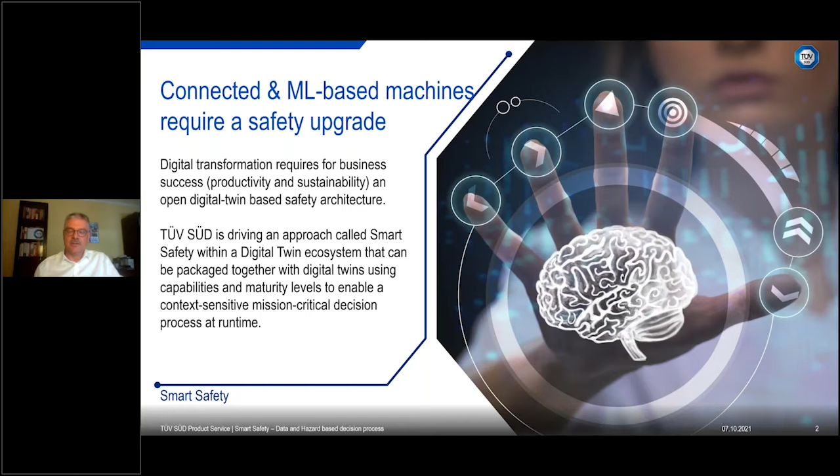Safety principles require an upgrade to incorporate context-sensitive, mission-critical decisions for connected factory lines. The foundation has to be an open source digital twin ecosystem, and I'd like to introduce principles for how we can upgrade safety for such a system.

I'd like to focus my talk on 4 topics. Do we need a 4th pillar in the safety world? What we have learned in the direction of digitized safety compliance management. Then I'd like to introduce the principles of smart safety. I'll address a couple of use cases to show you the way we apply it and what are the benefits, and I'd like to end my talk with a summary of smart safety.

Safety and trust in production is based on 3 pillars that we have been utilizing for many years: requirements on organizations, the capability of people—we train people and have certification for persons—requirements for the development process, where we certify process capabilities to ensure the quality in our products needed for safety applications, and the 3rd pillar, requirements for the product, which we also certify and test.

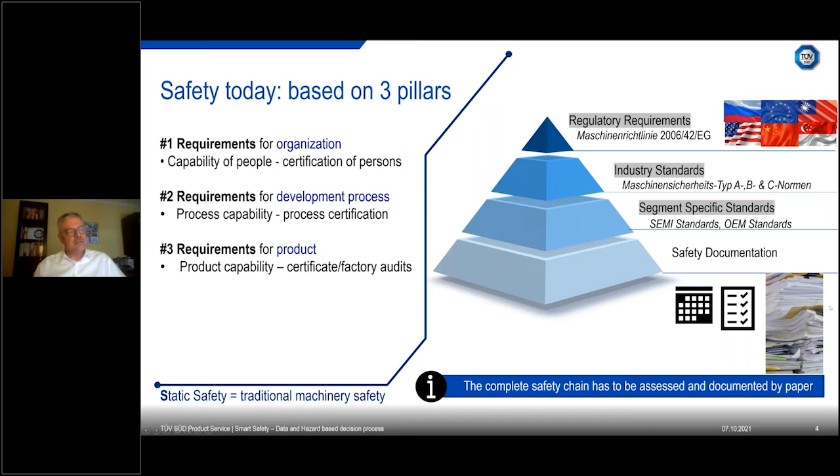From the regulatory requirements, we derive the major topics, then we have the industry standards, and we come down to the segment standards. What we see at the end of the day is mainly safety documentation. But safety documentation, even if it is Excel or PDF or requirement management, at the end of the day is paper-based. What I'd like to discuss today is how we can bring this kind of documentation into the digital world.

10 years after Industry 4.0 was introduced and invented, we still miss the adaptive and autonomous factory lines, which are able to handle changes of products, changes of supply chains, and different qualification of workers. We don't see this. We are still waiting.

The question is, why is smart factory hardly available? The focus on decision making was missing. The focus on upgrading the safety architecture to enable decision making for mission-critical applications was missing in the past. How could industrial automation work without trust, especially trust into safety and security?

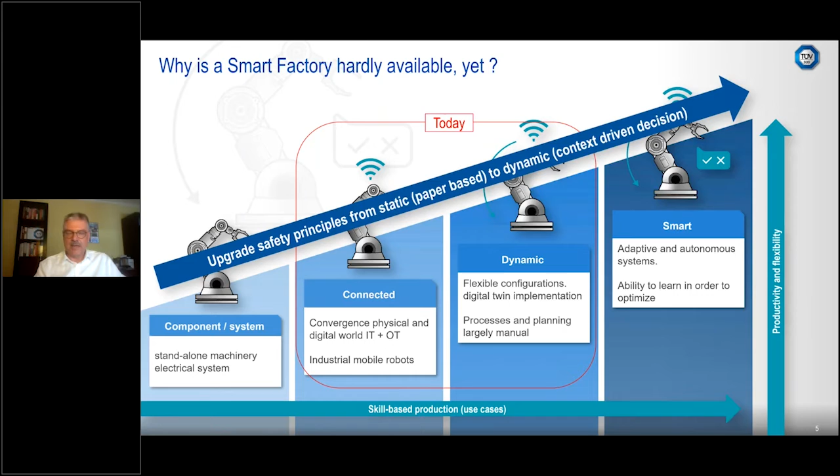So we have to do our homework, and I'd like to show on the slide how to upgrade the safety principles from a static, paper-based, PDF-based world into a more dynamic one, with context-driven decisions.

Smart manufacturing, as we see on the right side, is based on data analytics at runtime, optimization of processes, and predictive services. Most of our customers are working in this world.

The technical safety lifecycle has to incorporate all relevant changes during production and all modifications during maintenance and so on. We have to accept that a static assessment has to be combined with some dynamic elements to generate the level of safety and security we need for this ecosystem.

At TÜV we have been working for more than 5 years to add a 4th pillar to this technical safety lifecycle. We call it an event-triggered hazard and technology assessment and a validation of the measures required at runtime.

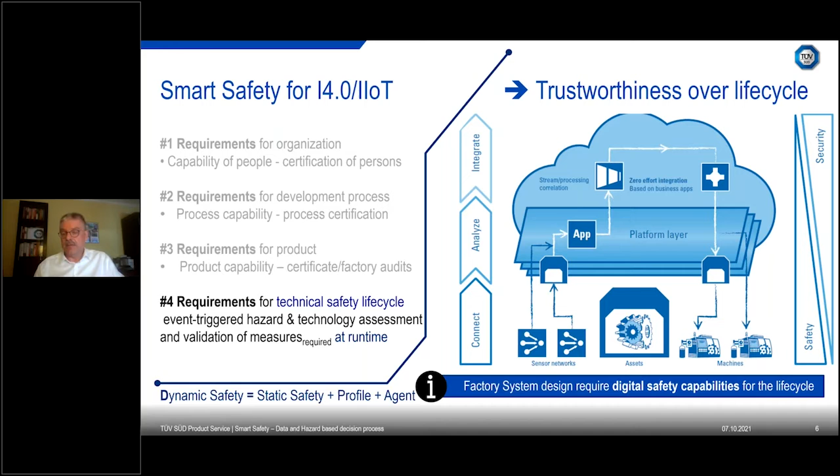This fourth pillar is the enabler for concepts like plug and produce, and also smart safety or condition-based safety, under consideration of the environment of the machine and the state of the factory, recipe, people, and machines.

What do we learn within TÜV? That is a topic I'd like to focus on in the second chapter, and the direction we are going in the safety world. I'd like to focus on the technical lifecycle of a machine, because smart factories consist of a number of machines, tools, software apps, people, workers, and so on.

Let's start with the typical design phase of the machinery manufacturer. We make the correct hazard and risk assessment on paper. We develop the machines according to the rules. We integrate the machines and confirm compliance typically with an attestation of conformity, well known as the so-called CE conformance. Then we start to modify on a daily basis, assuming mostly all minor changes will have no impact on the safety concept defined years ago.

This is true if we have a limited number of changes and if people can really judge all of these changes. But at the end of the day, today we have to accept hundreds of minor changes in apps, in software, in configuration, in recipes. And the question is simply: do we have the right safety measures in place that we designed and agreed on a couple of months or years ago?

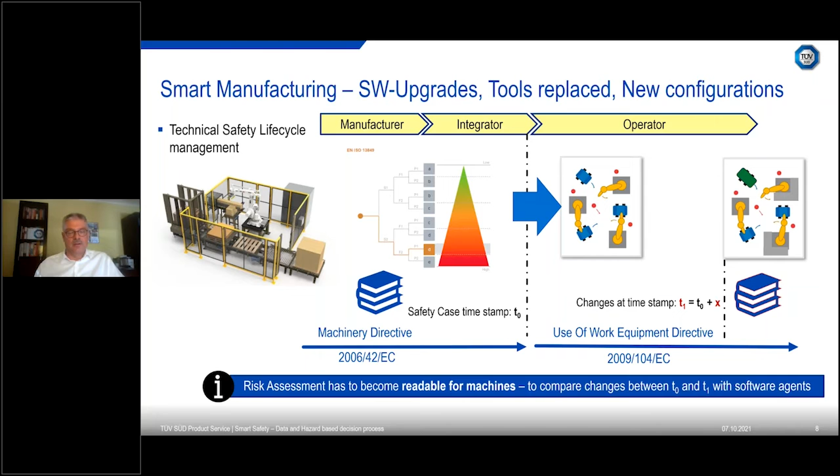So it is clear we have to be able to prove within the digital twin world if the assumptions we made, I call it here this slide at T0, are still true. And if yes, we go on. And if not, at least we should document these changes and we should be informed. We started at TÜV in the Smart Factory KL with the thinking of doing a risk assessment at runtime, and it's a very complex area. The community has been working for more than 10 years on risk assessment at runtime, and you know from autonomous driving that it's a complicated task. Today I'd like to discuss that we do not need to do a complete risk assessment. We have to bring the right topics, hazards, into the digital world, and then we can solve the problem in a robust way.

How do we do this within TÜV? I think we created a machinery compliance platform about 5 years ago, where we bring all information about robots, machines, assets into one platform. So we have the safety requirements, we have the standards, we have the hazards, we have the control measures that are required to build a machine. And if you later on add the inspection results, you have everything at one single point of truth. What a customer gets is statistical data about the hazard pool. We can analyze them, we can derive weaknesses and strengths of different machine types, of hazards, of safety measures. We have a project dashboard, we have an overview for our customer, and we have intelligent checklists because we learn during assessments what kind of specific questions will help identify all weaknesses.

We are starting to integrate digital safety rules within our own database by continuously analyzing all the hazards and the safety relevant data. And we need the data first, and the safety data is very important.

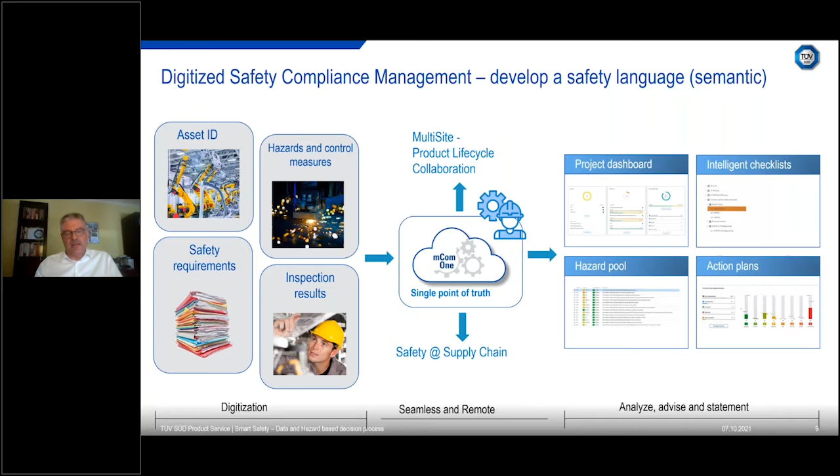Let's investigate for a minute the typical safety compliance process we've been using for years, quite successfully. So how it looks like: I start with the mCom One, where we have the asset information, a typical machine, a turning machine, or a robot. This robot, this machine, has some intrinsic hazards during the development process of the machine. We investigate all the hazards that are important for the intended use case, for the assumed usage of the robot, of the machine. For all these hazards, we do an extensive risk assessment and we document this.

The required risk reduction for the intended use case is selected, and the typical way is, number one, change the design of the robot or the machine. Any asset with less hazards is better. So a machine design with potentially less hazards is much better than a lot of additional safety measures. This is one of the basic safety principles: keep it simple.

Of course, we cannot design out all hazards, so therefore we need control measures, we need safety measures in our own asset, in the neighborhood, in the building, and so on. We develop them, we release them during the integration phase or the release of the machine.

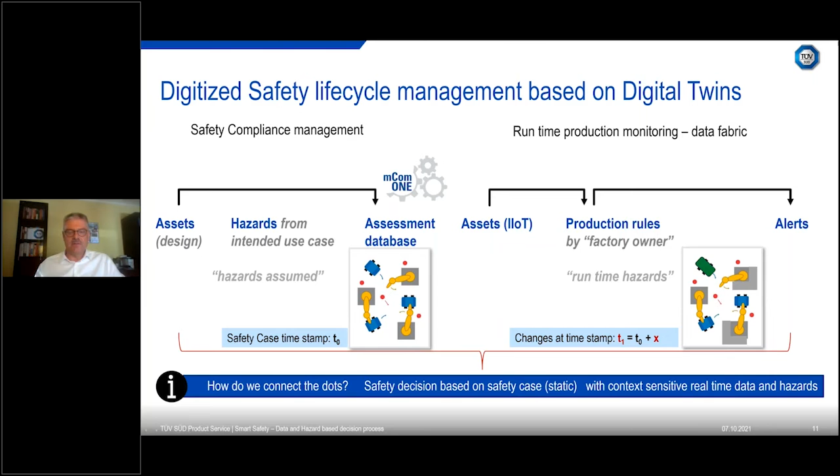So the question is, how do we connect the dots so that the safety decisions based on static safety cases can be combined with context-sensitive real-time data, and maybe additional hazards that you would only see in this situation.

I like to summarize at the end, let's call this safety process an overview. So on the left side, we design a machine. We have an intended use case. We do a proper hazard analysis.

We do FMEA and FTA, fault tree analysis, for this design. We do test and validation to ensure all the safety measures are accurate, and if we can detect the people, the hand, and all the things that are critical, we describe it in a safety case. Based on the safety case, we can do certification of the machine, we do the CE conformity, and then we integrate the machine in the factory line, and it depends on if it's a complete or incomplete machine, we have the CE conformity achieved.

Now the question for us is, if we run the operation, if we modify the robot arm slightly, if we have different recipes, if we do some maintenance, we have diagnostic running there, and we have the monitoring system of our automation. Do we have a safety case with the context, with all the information as of today? No, we don't. And what is missing? The dependencies between all information in paperwork, in standards and assumptions, and the usage that we are having now at this moment in time.

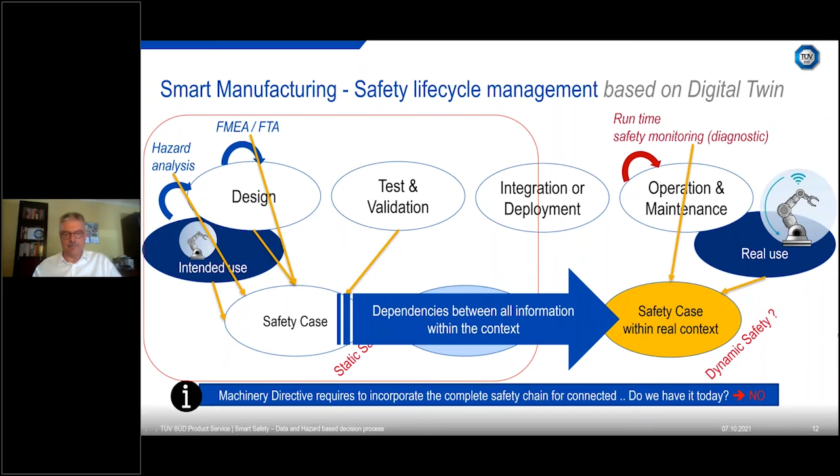So this was the introduction, what we have learned. And now I like to show that if we apply the same principles and we add safety semantics and the knowledge graph, we do exactly the same, and we can handle runtime or real-time situations.

Let's look at the same thing I explained in the last chapter. So we have the asset, we have the hazards, risk assessment, required risk reduction, safety goal, avoid collision, and then we go into the design process.

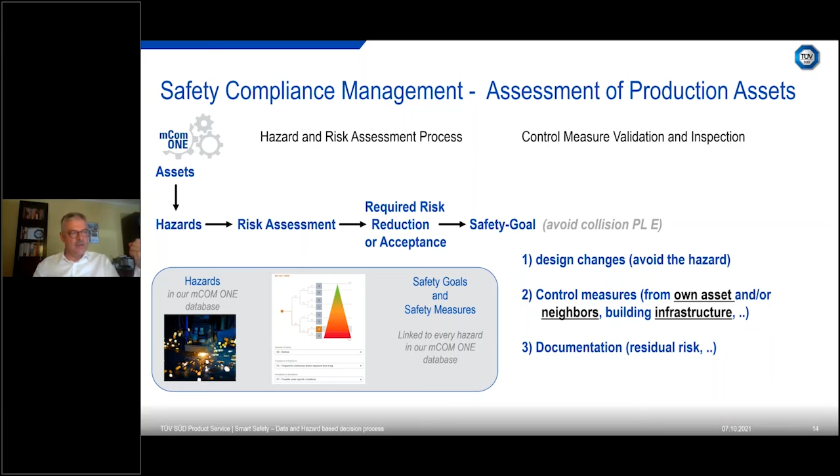We have a database. So we have in our database the type of the machine and the hazard linked to the safety goals and the safety measures. We have enough statistics and we can do data analysis.

Let's move now to an assessment during runtime. Why do we need an assessment during runtime? We like to increase the productivity. So preventing to run into this safety stop situation, what all of you know, yellow blinking machines that stopped due to any reason. Less downtime means higher production.

What can we do if we are doing assessment at runtime? We can change the route of the green AGV to avoid the collision hazard. We cannot redesign the AGV or a machine. And if we cannot avoid the hazard, we can give a warning at runtime about the residual risk, using the green AGV compared to the blue one. If it is higher, if it is different, we have to inform the worker, the red dots in this slide.

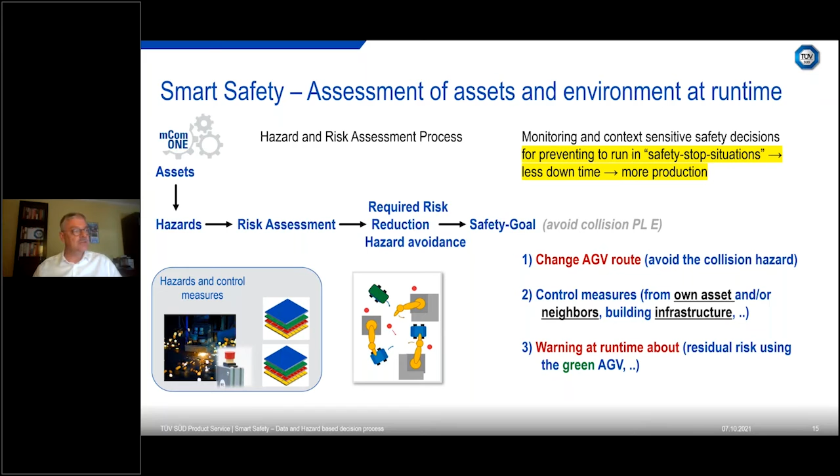What is necessary? We need a way to communicate between different AGVs, between different people, between different robots. So that's what I like to show here. A colleague of mine invented this, that we need a couple of layers to communicate in this factory line at runtime or even at real time, because we are discussing safety critical, mission critical operations.

We started to fill the safety profile and we realized it is not enough to make decisions based on profiles. So therefore we created 4 layers of an information hierarchy that we would need to make a mission critical decision. Safety cannot be negotiated, and I cannot use a data learning algorithm to make a safety decision. There are rules behind it, and therefore we have a trust vector indicated.

And I like to show briefly that we have to start with an identifier. So we have to classify our machines into groups linked by hazards. You see it here, actuator powered machine active, as an example. If we have 2 or 3 of them, then we start a communication, and at the first line we have to understand what is the trustworthiness of this other asset in terms of reliability, resilience, safety, security, and privacy.

We are working in a digital twin consortium to drive this concept of a digital twin trust vector in the communication layer if we target mission critical decisions. Then of course we need a digital twin safety profile. The safety profile is linked to the source of hazard and to the safety goal. And with these 3 basic layers, we can make a decision.

If we like to go deeper because the other asset has the right trust level, we come to the measures, control measures, other measures that are developed and documented. And normally we have most of this information either on our side in mCOM ONE or Industry 4.0, OPC UA, information models, administration cell, and so on.

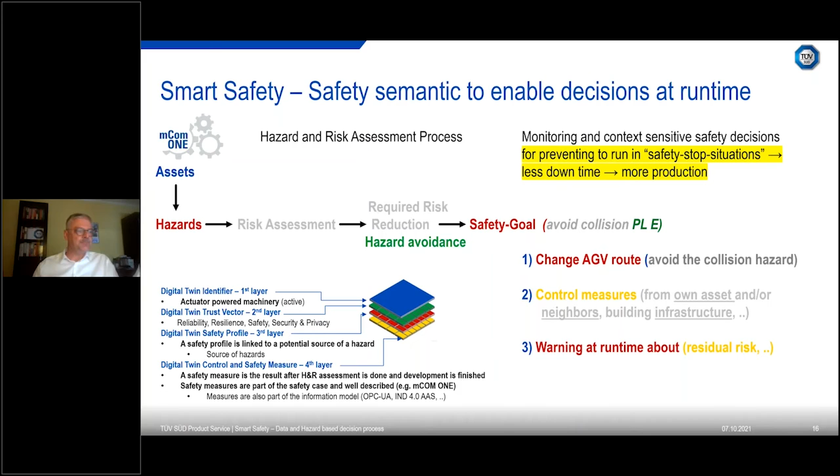So again, the target that we have is to change the route of the AGV, avoid the collision hazard if we expect a collision hazard, or give a warning at runtime about the residual risk, what could be the critical part if the green AGV runs into the situation. I like to summarize again. What have we changed now? We have the same hazard and control measures.

We added a safety semantic, digitized rules for how we make an assessment. We skip the risk assessment completely because we have enough data for every situation to apply the right performance level. Now the question is how do we compare the green AGV and all the information about the green one with the blue one, accepting that the world is incomplete.

We are on a real factory line. Not all the fields are filled out as we would expect, unlike at the theoretical research level where we always see complete data.

We replace the blue one with a green one, using a knowledge graph. We have a knowledge graph for the blue one and for the green one. If we compare both, we see dependencies, the important dependencies, and based on this knowledge we can make a decision.

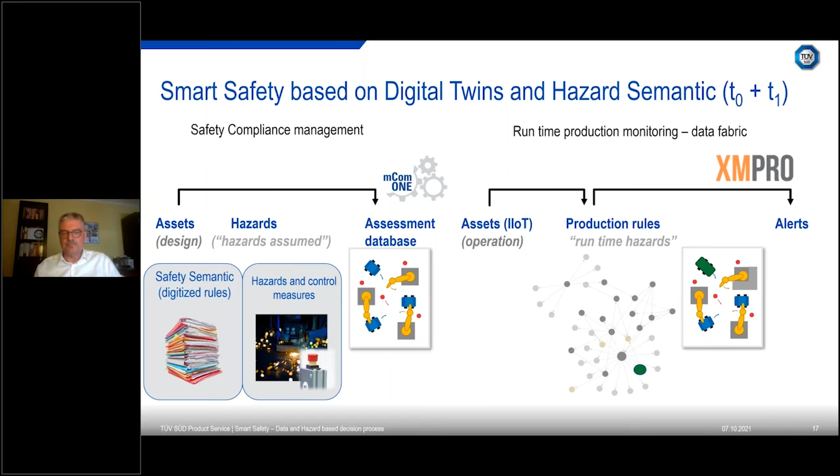I'd like to briefly show an example my colleague Michael Pfeiffer used: an AGV on the left side, theoretical. We have the safety profile to prevent collision. You see a couple of brackets and information there, different layers.

On the right side, you see the same AGV now running in operation. What's different? Now we have a load, so we know the weight of what's loaded. We have the drive, we know the speed. Now we see a collision in front of us and the real hazard, and we compare the left side with the right side to draw conclusions about what to do next.

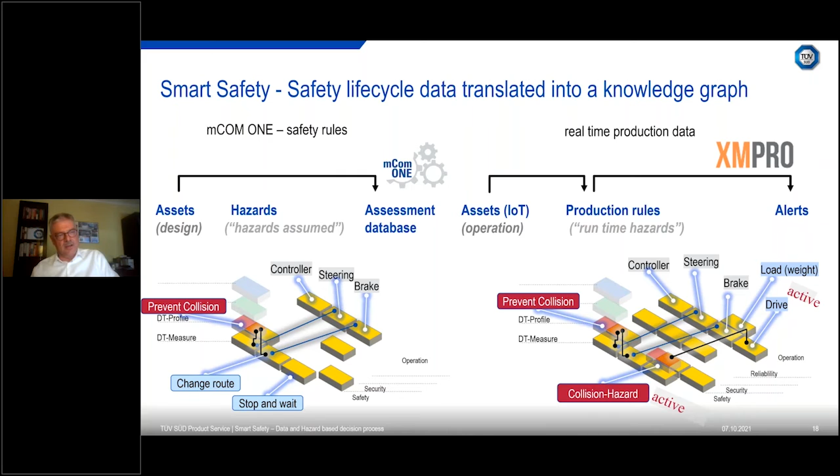To understand what we mean by a knowledge graph, it's making a connection between different kinds of information. There's a residual risk described in a standard, an assumption in the risk assessment paperwork, and a situation we see now, and we can calculate if it fits the left or the right side.

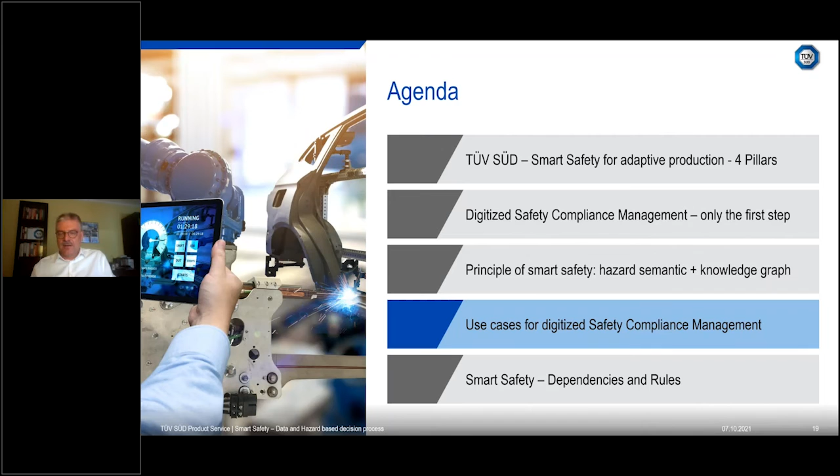This was, in a nutshell, in 10 minutes, all about smart safety. I'd like to move to the use cases, starting with smart safety itself. Productivity requires trustworthiness. I'd like to thank the Smart Factory in Kaiserslautern, Professor Zühlke who introduced me there, and Professor Ruskowski who is driving the activities.

Everything I described in the last 20 minutes was developed together in different working groups within the Smart Factory, infrastructure or safety working groups, over the last 5 years. I've included some sketches and white papers so you can read further.

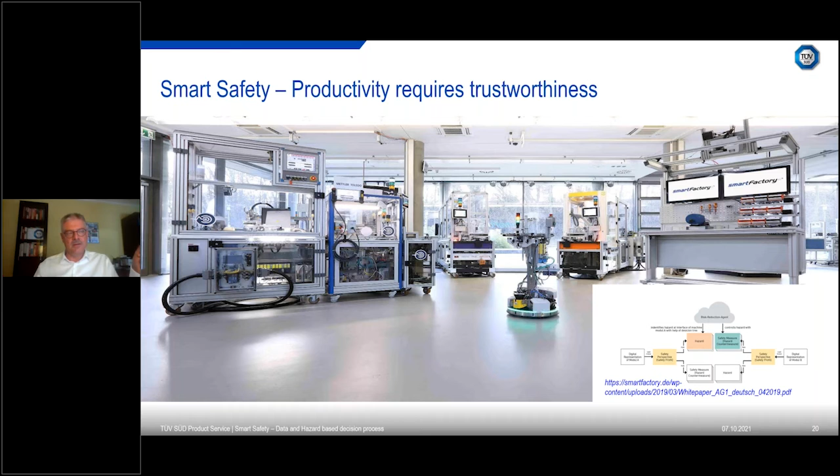But the message today is that I have to motivate the industry. It's time to step out of research and integrate these concepts into our factory lines to get more productivity and to come closer to the autonomous digital twin usage that we all need.

The technology, digital twins, knowledge graphs, give us the opportunity step by step to enable a more holistic understanding of our factory. So I've described here what is the awareness of the behavior and the environment.

We don't discuss the theoretical intended use case, we discuss the condition we have now: what is the temperature, is it raining, are we outside or not.

What next? Trustworthiness in perception. What do we plan, what is the next operation? Will the next operation bring us into a hazardous situation? Do we have to follow this planned assumption or not?

And how to achieve availability and safety, how we can balance the highest productivity with the highest safety requirements. You see it now here.

If I look at T1, at this point in time, we have the weight of the workpiece, and we can calculate the probability that parts could fly away. We could still stop the operation because there is some time before the parts fly away.

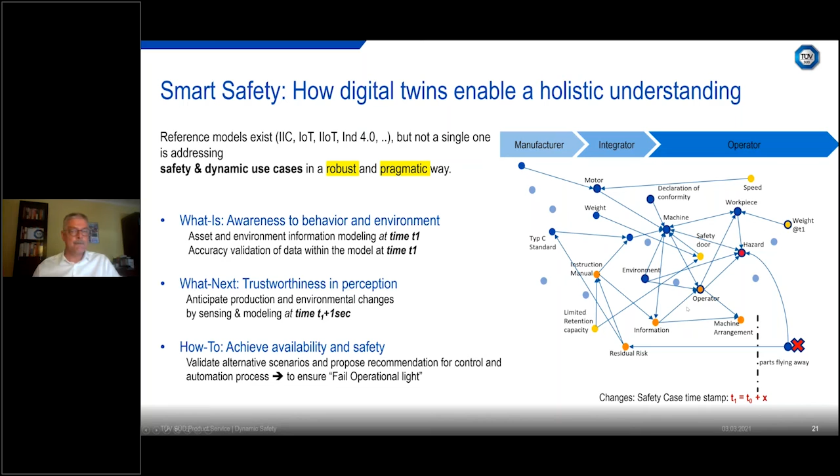Safety lifecycle based on digital twin and knowledge graphs, that's the key message I'd like to give. What we learned working together using the Empolis knowledge graph in the Smart Factory KL is that we have to differentiate between two classes.

One is the discussion about system level, which will be described in the new Smart Factory KL white paper. The other is the machine level, the asset internal interdependencies, which is what I tried to describe in this presentation. If we bring both worlds together, we can utilize this and get excellent results.

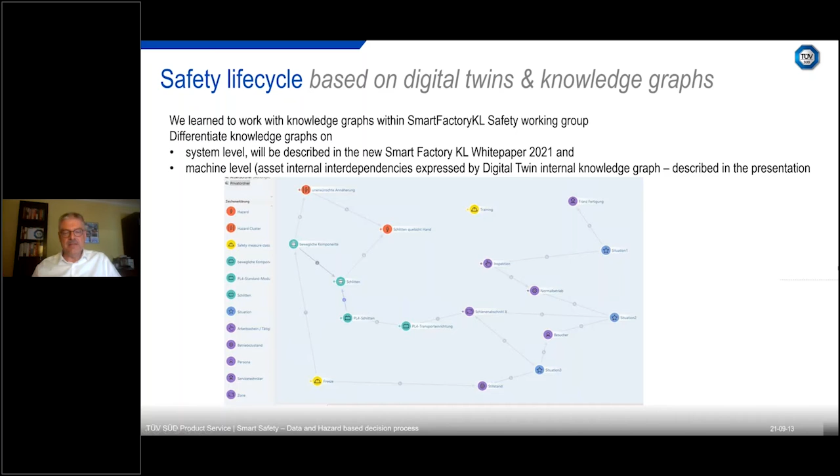Now I'd like to show one or two complicated examples so you understand the capability. I'll use a very simple turning machine. I've skipped the pictures where people get killed.

There's a turning machine, a workpiece, and a protective door on every turning machine, and it can hold back a workpiece of 50 kilograms. If I try to operate with a workpiece of 300 kilograms, there's of course a residual risk that this part could fly away. I'm still allowed to work because the turning machine can handle maybe 350 kilogram workpieces.

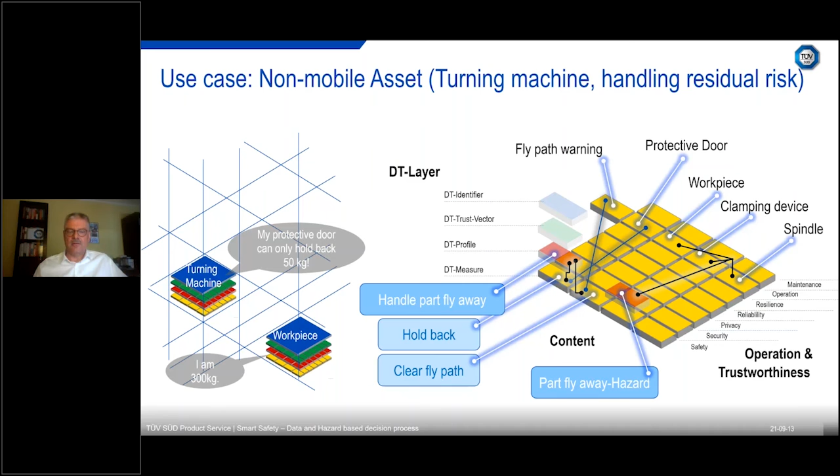So what can we now address with smart safety? You would ask, you see the turning machine in every factory line. If we bring the workpiece, the turning machine, and the people together, what I'm doing on the next slide, we have a context-sensitive safety. If you realize that in front of the turning machine is a green worker, trust level safety 3.

Her operator is aware of residual risk, he is trained, he can decide by himself how to go on. If it is this yellow-green one, we have to inform the operator, are you aware that you have a residual risk now at this moment in time? Please step 50 centimeters to the left side and you are out of the risky area. If there are humans coming from a different company, we can communicate, we can give him the clear message, step to the left side and give him a warning there could be parts flying away.

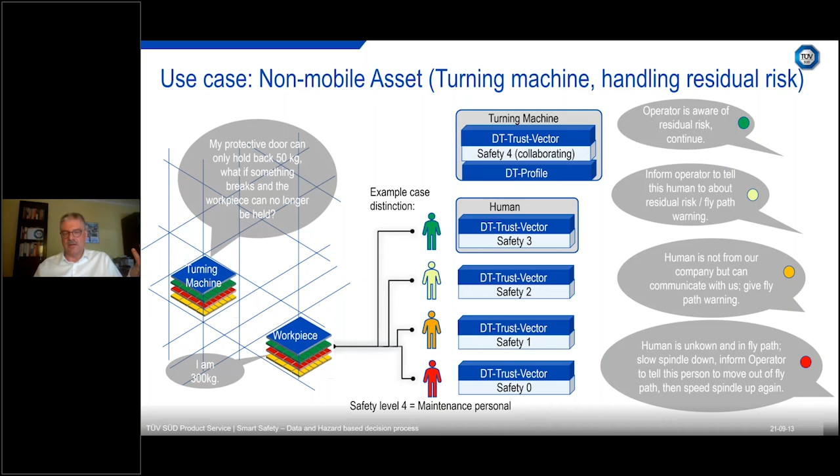And if it is somebody that we cannot communicate with, lowest level on our trust spectrum, of course, we stop the operation. We inform the operator that he should take care that this guy disappears. So we bring now machine and people together, and that's what it's all about in Industry 4.0. It's not only operate more, it's context sensitive decision. It's the target that we have in front of us.

I like to give a basic summary. Safety will stay application specific. There are hundreds of standards. Hazards are linked to safety integrity level by the risk assessment. We know this and we keep everything that was developed in the past. But smart safety, a domain and factory specific maturity model for the factory line, will give us 3 options.

If 90% of the information are available and the trustworthiness is given, we have context-sensitive decision, we optimize productivity. If only a limited number of information is given, but the trustworthiness of the assets is high, we can think about a degraded operation. ZVEI is discussing this in their standardization. And for me, the most important part, if we have significant risk because the intended use case does not cover the application, we have solved our liability problem. We document it and we know with the right safety experts what to do.

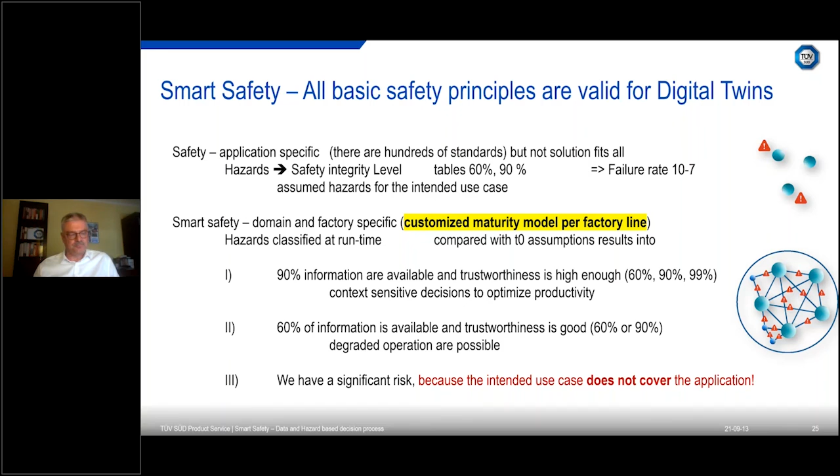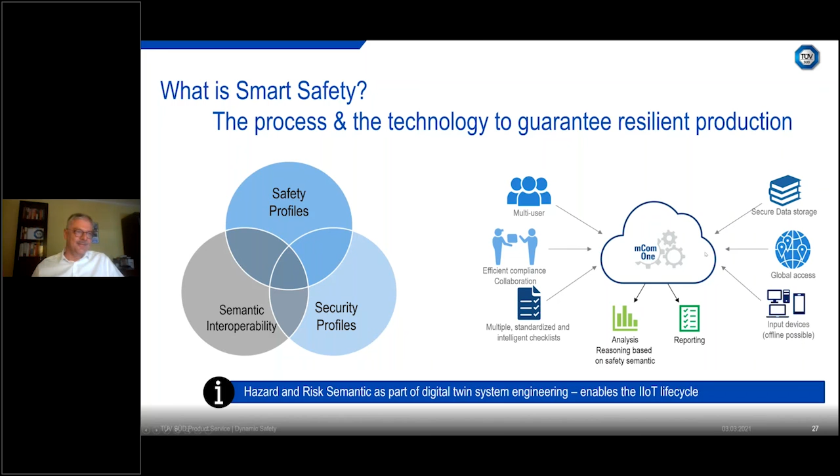At the end, I like to summarize what is smart safety. It's the process and the technology that we need to integrate or bring on top for a resilient production. So we need safety profiles. We need the same for security, but I do not discuss that in this keynote. We need semantic interoperability, which I covered slightly, and of course we have to start to collect data about hazards.

About the control measures that I explained in the middle part of my presentation. We translated into our world components and systems: standalone, connected, dynamic, and smart, and we brought it together with the trustworthiness discussion of the IIC: privacy, safety, security, resilience. And we came to a simple example to say we need more resilience on the asset level and we need more resilience on the system level.

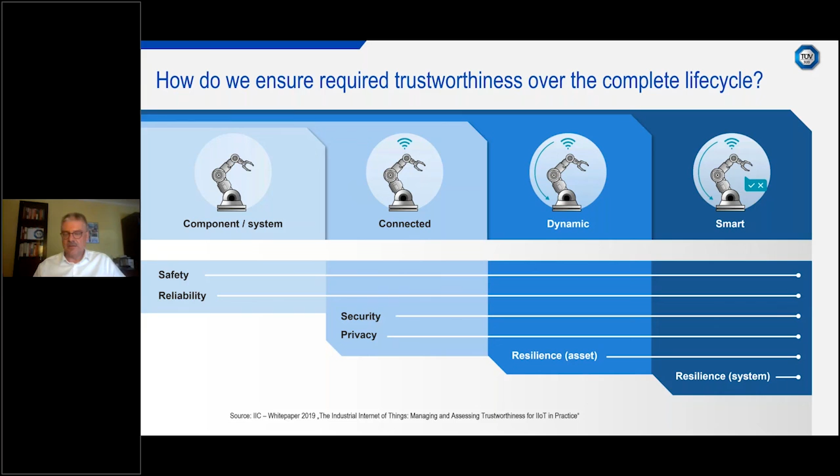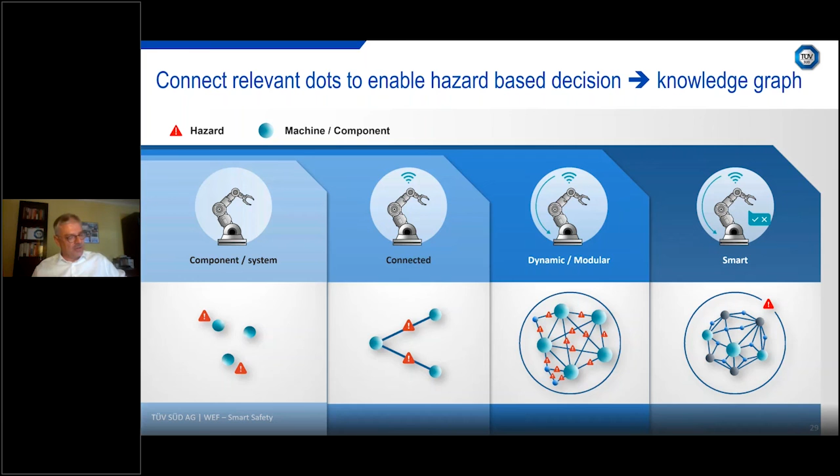And what does it mean? Utilize all the information that we have, because resilience means we have more information about the same topic than we need. If we collect all of them, we can make the decision that gives us the productivity. So this is the picture that shows bringing assets and hazards together, combined with the knowledge graph, and you are able to increase the productivity.

I like to end with what are the next steps to upgrade safety for connected machines. We need customized maturity models per factory line. We have to work on digitized safety and security compliance management to ensure higher productivity. So we have to design the machine and the system in a way that we can utilize this benefit.

We are working on context-sensitive understanding, the decision-making for mission-critical applications, handling of dependencies between assets at runtime, what do we need to make the decision, and to try to digitize together with our partners the rules to handle the gap. And that's what we are focusing on. We are focusing only on the gap between the intended use case that we have designed for and the real use case. And if there is no gap expected, then we continue with the safety solutions we have.

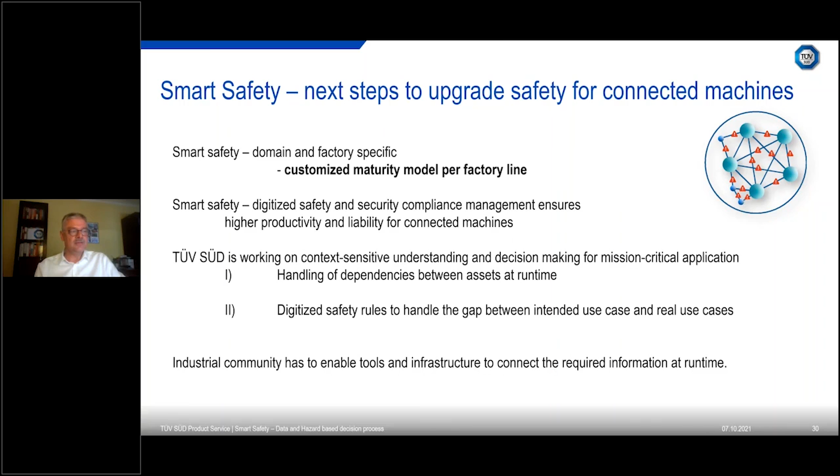So the industrial community has to enable the tools and the infrastructure and the semantic that we can connect the required information at runtime.